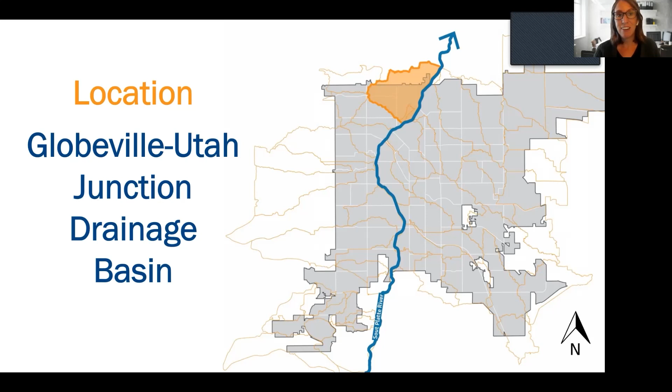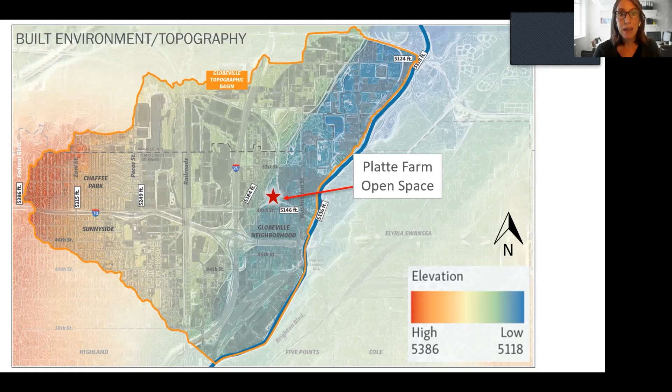However, there are some features in the built environment that act as levees, such as the railroads and the highways, and they prevent water from traveling in that west to east fashion seamlessly. And instead, much of the water has to be directed through underpasses. Where the red star is, that's where the Platte Farm Open Space Project is located. And you can see that the area is just at the boundary of that part where the basin gets pretty low and flat.

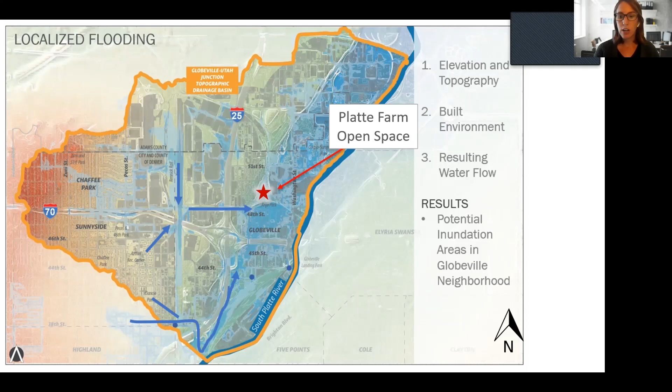For site-specific conditions, it's a very large project limit where it's a 5-acre brownfield site. Before the project and even afterwards, the primary use of the project is as a transmission line easement for Xcel Energy. And so much of the parcels before the project was initiated were owned by Xcel Energy. And there were a few that were owned by the City and County of Denver, and then a few that were owned by ASARCO. And the reason that it has a brownfield site designation is that it was a historic EPA Superfund site because there was a smelter that was located just a quarter-mile north of this property.

And that smelter, for many, many years, had melted down different metals, and then that was deposited through the smoke that the factory emitted all through the Globeville neighborhood. And that's what the EPA Superfund designation was from. And between 1993 and 2011, there was a remediation effort that took place all across Globeville, where the individual owners of the parcels were able to decide if they wanted to have their land remediated in a way that they would excavate 12 inches of soil or put a 12-inch cap of soil. And so for the Platte Farm Open Space 5-acre property, there was a mix between excavated and completely clean soil versus some areas that had a cap. And so that made it a little bit challenging for the project design teams in terms of grading and excavation.

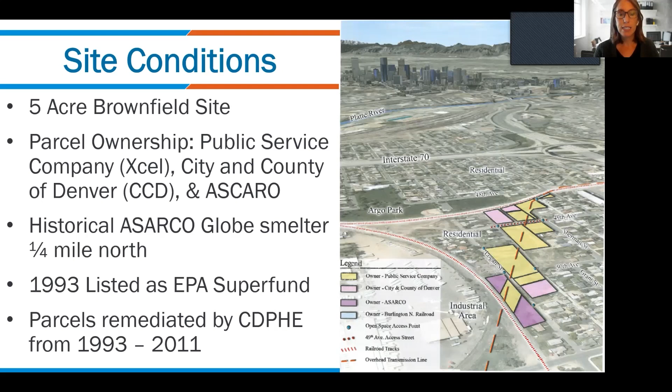It's very interesting because adjacent homeowners even had horses and let their horses roam around the property. There are lots of deer that come through here, foxes, birds, and so the neighborhood takes great pride in the natural elements of the property.

However, over the years, the community started to recognize that there was some unwanted activity that was occurring within their valley, and they started experiencing dumping, late night joyrides, people abandoning cars, partying, as well as, when I showed the image of the topography, some flooding, because it's a lot of water coming from upstream, and this is where the basin flattens out.

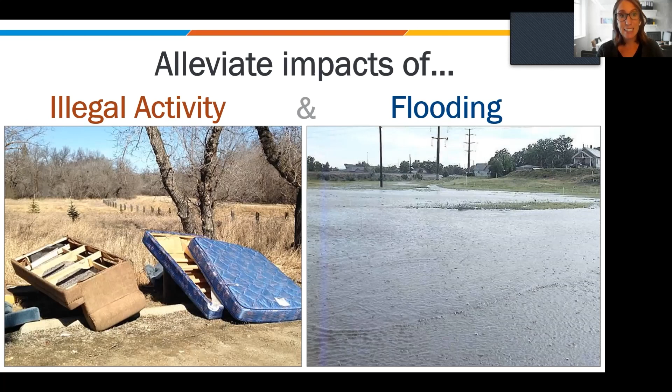That was in 2006. And so since the very inception of this project, it's been a community-led effort where over this 10-year period between when the community members started the project and design started, the community would work tirelessly on project outreach, project planning, and project fundraising.

In 2016, a total of 10 years after the project started, the project design began with the vision and design objectives that were identified largely by the community. And so that vision was to create a low maintenance open space area where the residents and visitors could recreate, exercise, and most importantly, connect with nature. They wanted it to be a safe place, and they wanted to maintain that natural look and feel.

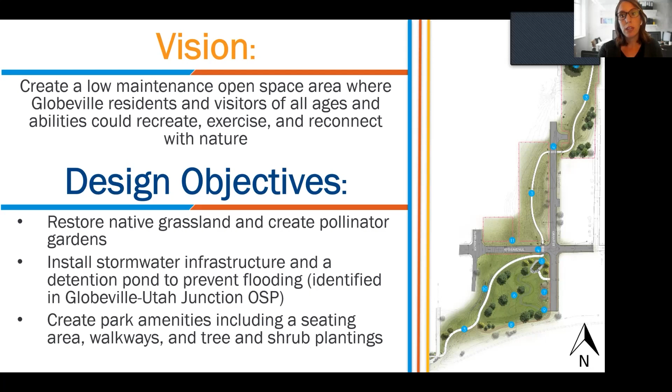Initially, to simplify the project coordination and funding, the decision was made between the two project partners, Denver Parks and Rec, and the Department of Public Works at the time, which is now the Department of Transportation and Infrastructure, to delineate a boundary between the parks and the stormwater elements. And so that boundary was initially 49th Avenue, where anything north of 49th Avenue was to be 100% parks elements, and anything south of 49th Avenue would be where the detention pond and all of the drainage would occur. And initially, we thought that that would simplify the cost sharing.

But once we got a little bit further into design, we realized that there was a significant amount of flow coming from the north, so it would be beneficial if we could gather it through depressions and inlets and direct it to that detention pond to provide greater protection for some of those northern residents along Grant and Logan Street. And so the boundary was eventually eliminated so that we could do just that.

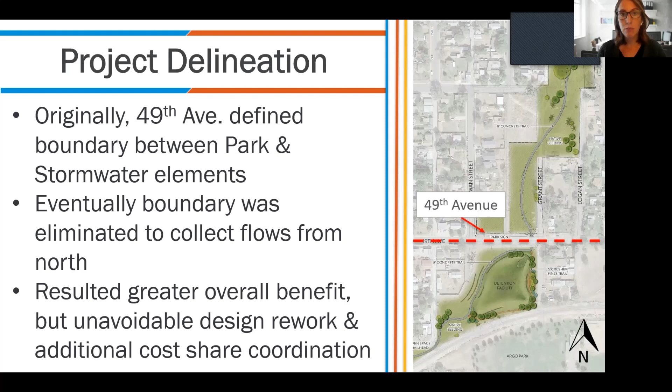What it ended up doing was resulting in a greater overall benefit, but it did produce some unavoidable design rework with the site survey. And then there was a lot more coordination in terms of line items for the cost share and coordination of who pays for what when the entire project area has multiple benefits and multiple stakeholders.

And so once the parks and stormwater elements were combined, the difficult work began of creating a design that met all of the stakeholder goals and interests. And balancing those project goals included the drainage level of service conversations, where the drainage team wanted to provide a maximum drainage level of service, and Denver Parks and Rec park priorities. There were really strong opinions, because this was a community-led effort on the community's vision and what they wanted to see at the project site, including what trees they wanted to keep and what elements of their vision they needed to have in the final product design.

And then there were city standards that we had to meet, or some that we challenged, such as curb and gutter, where the community vision conflicted with the city standard to have curb and gutter. And so that was something that we had to work through and challenge. There were also environmental goals and considerations that limited the amount of work that we could do. And then finally, the cost was something that needed to be balanced with all of the other project goals.

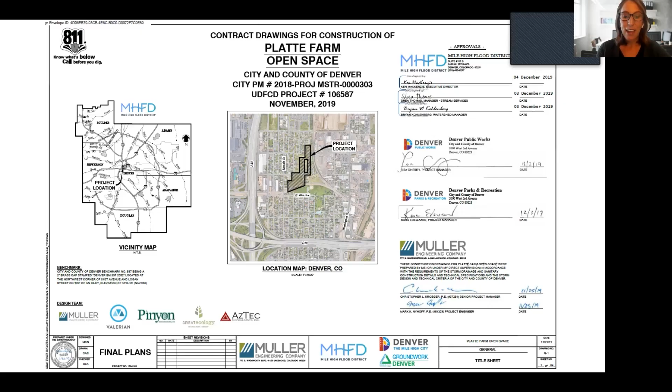However, in the fall of 2019, we were able to work together and finalize, by a miracle, a design that met everyone's desires. Some design elements that were integrated from a drainage perspective that helped achieve a seamless integration of detention features throughout the park. One of them was a varied bottom pond design.

And so initially our goal was to provide residents with the maximum amount of storm protection possible. If we went with a 100-year detention pond in this very, very limited amount of space, what it would end up looking like is a giant bowl with very high boulder walls. And from the very beginning, we got pushback from both the community and Denver Parks and Rec that that was just not going to be attainable. And so we integrated a beautiful varied bottom pond design, which achieved between a 25 and a 50-year storm protection at the end of the project.

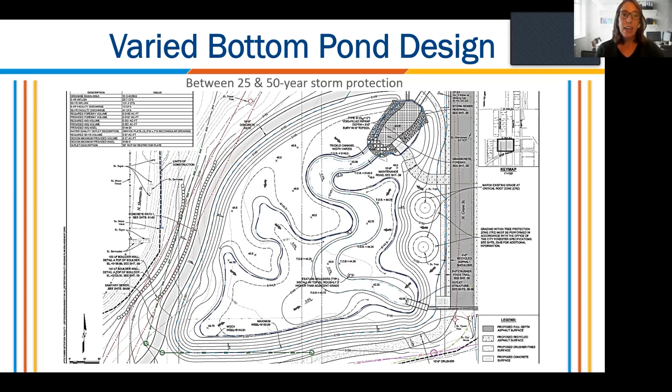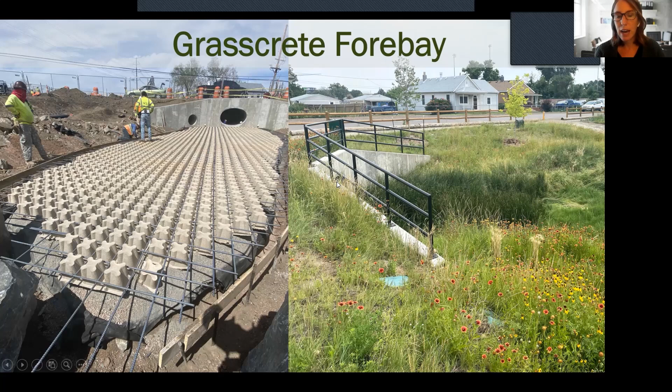Another design element that we integrated to ensure that the project looked like a park and not like a drainage facility was a grasscrete forebay. And so in between concrete elements of the forebay, there would be vegetation that would grow to make it look seamless. However, when maintenance needed to occur, a truck could go in and scrape all of that vegetation away, and the roots would still be intact so that it would grow back the next season. We're really, really excited about how the vegetation came in on this project. And so the photo on the right is that application of that grasscrete forebay.

And then finally, we integrated pollinator garden entrances and exits throughout the site that concentrated really beautiful landscape elements, and that will provide habitat for bugs and bees and a beautiful entrance for the community.

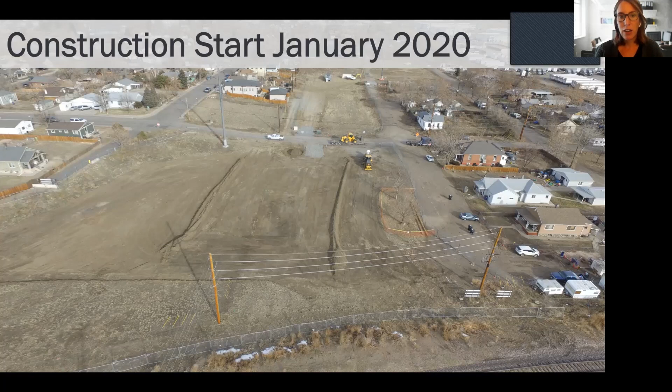Construction kicked off in January of 2020. This is an aerial at the very beginning of construction, and we were very lucky that the community was so involved in the planning and design because it made public outreach extremely simple, and this is not a very popular transportation route of the city, and so transportation detours were not that difficult for the project.

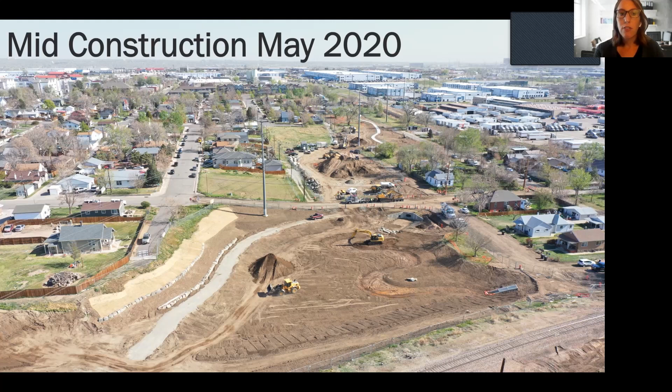We reached the middle of construction just 4 months later in May of 2020. This is an aerial looking north, so from the detention pond north of the construction midway through. And then finally, just 2 months later, the construction team was wrapping up with their efforts. And so once the project was under construction, it moved quite rapidly.

There were many lessons learned during project construction that could honestly be their very own CASFM presentation. Those included Xcel relocation issues where, in the very beginning of construction, there were a few instances where the Xcel poles were not relocated in the appropriate location, and then the decision was made to underground, which delayed the project and resulted in coordination with the BNSF property.

Bedrock was encountered during the excavation of the detention area that could have been avoided if we had only done more bores during the design. And then lastly, the decision was made to substitute the crusher fines trail for a material called polypave, and our construction team was not especially happy about that.

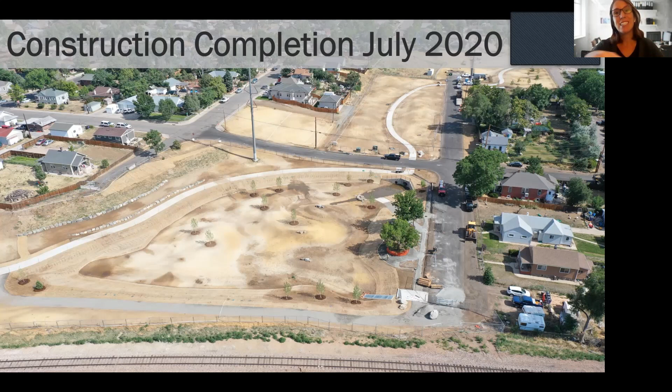We, as a team, as the city, as the district, all of the consultants that helped with this project, the community, the city council office, we are all so very proud of the Platte Farm Open Space project and believe strongly that the community's vision to develop a safe space for community to connect with nature was met.